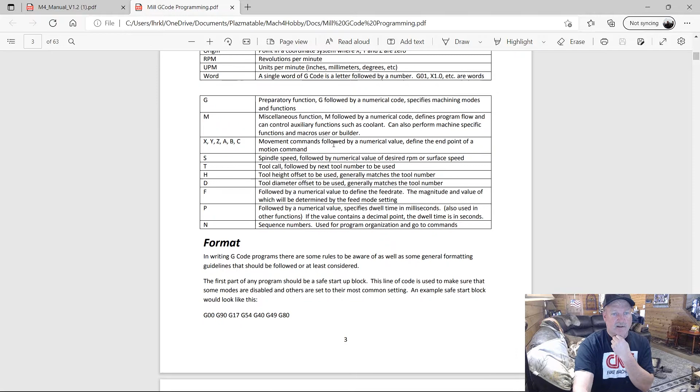I'm trying to learn more about the milling part of things in case I can put a spindle online at some point. But that's not what I'm here to tell you right now. I was just telling you that you need to read that manual through. So I've already got it opened up right here. I forgot I already had it open.

So if you look at the top of this, Philip, you need to look through this manual. This is really a pretty well laid out manual, actually. And a lot of the things I didn't know early on, even though I'd read this, I just have a better understanding of it now than I did then, because I've done so much stuff with it and I understand a lot of the things.

If you read this for the first time and you don't really know for sure, Mach4 was on the old Series 1 controllers that had the old chain drive, as far as I'm concerned a piece of junk type system, which people would argue were wonderful, but it's like any plasma, whatever they have, they think is great. So the Mach4 XT machines were the most modern ones that they built. That was the last versions they made on this platform, not talking about their commercial type stuff.

But if you read through this, I just want to show you that this is there, and if you need a copy of this, I'll be glad to send it to anybody. It was on your computer and on your USB drive, I'm pretty sure. This is really all we have that Ross wrote to help us know how to use the machine, okay? Next is, I printed your G-code, Philip, that you were having issues with.

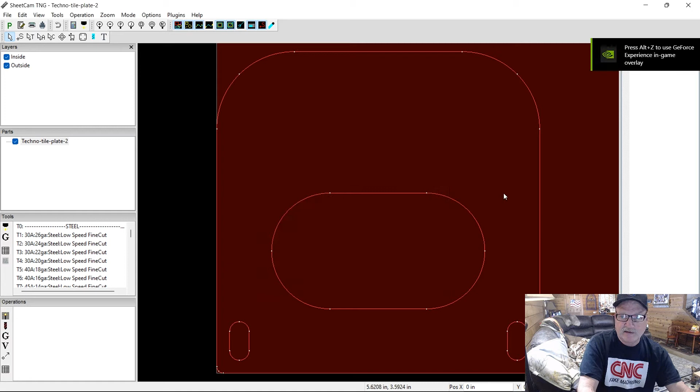Okay, I know this one has bigger holes than your other one, and probably you had more problems with the other one. I don't really know, but just in case this is helpful to anybody in our group or anywhere, if this ends up on YouTube, that's just what you do.

You import your DXF file, and you can zoom this up, whatever you want. I usually keep the screen as clear as I can. This code editor is where your G code will appear when you're done post-processing. I usually just slide it out of my way and keep this up here as big as I can.

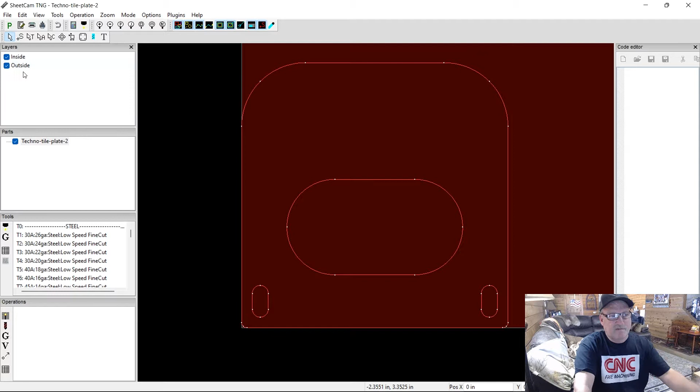So anyway, I don't know who drew this file, it's not saying that it's bad, but when I draw something, I usually have it all on one layer. Maybe you move these layers, I don't know, but so you have your inside layer, see there it went away, and then your outside layer. I normally move them anyway when I have some holes. These are big holes, so it probably wouldn't matter.

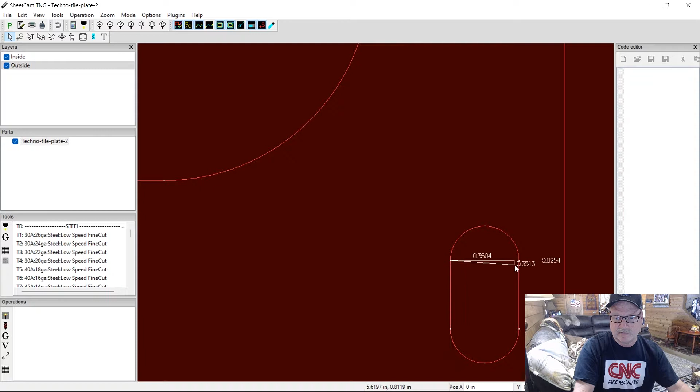This hole, if you wanted to measure it, that's 3/4 long, and I think it's 3/8 wide or something. Yeah, it's not super small. This one's pretty big. It's 4 1/8 by about... that don't make sense. Let me do that again. Maybe it does. I didn't remember it being that big. Measure. It says it's 2 1/4 inches by 4 1/8 on that big hole. So anyway, those are pretty good size.

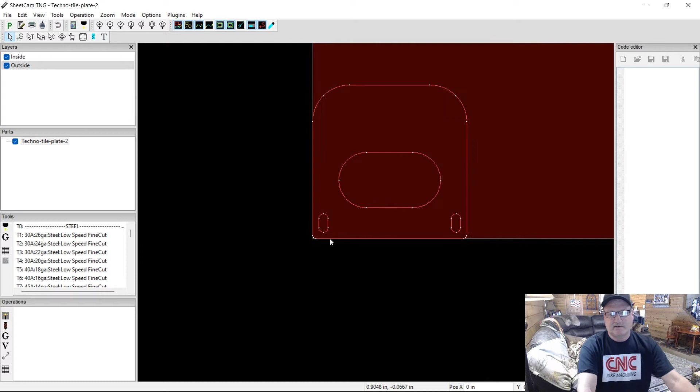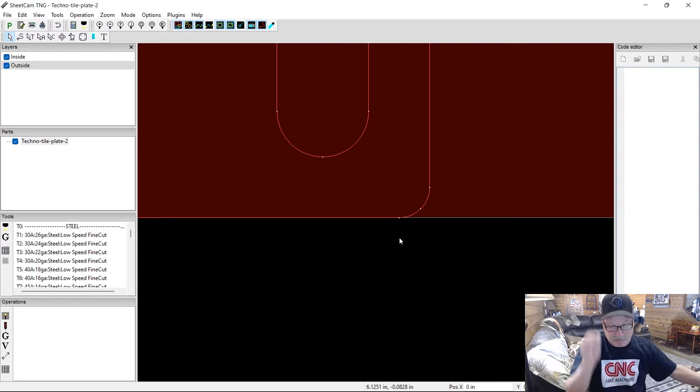And the thing that makes it hard to cut something like this without having a little spot on it is that everything on it has a big radius. I don't know what size these radiuses are, it don't really matter. It's probably a 1 inch radius or maybe a 1/2 inch radius. It's hard to put a lead on something like that without leaving a little spot on it. So I try to put those leads somewhere that hopefully they don't show up at all. I'll show you how I do those leads. And again, I'm sure you've already seen this. So let me just get into it real quick.

Now, even though these holes are bigger, I'm going to use the same type of methods that I would use on a smaller hole, and you can see these probably better than on a smaller hole. Mainly the reason I'm doing this is the G code that you sent me. The one I printed the first page of was on plate number 2, so that's the one I'm doing here. So the first thing you want to do is go over here to create a jet cut operation. What did I click? That's not it.

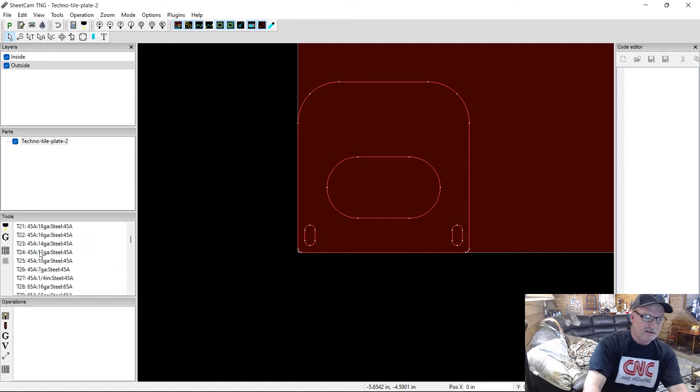Okay, and I noticed you were cutting 3/16 material. 7 gauge is what they call it in this tool. I don't know why they show this tool list here, because you don't really use that in Sheetcam much anyway. So we're going to start an operation on our inside. Make sure this says inside offset. Our layer is going to be inside, since you already have that layer. So we're going to cut all our inside features. This tool 26, 7 gauge steel, 45 amp, that is the right tool. This is exactly the way I would do it.

And if you'll notice, that says 70 inches a minute, and that's about right. 3/16 cuts 70 to 75 from my experience. And on that screen you had on Facebook, it looked like this machine was set at 98 inches per minute. That's part of your problem, I believe, on some of those cuts. It won't cut 3/16 at 98 inches a minute on 45 amps. It could be that you had that set on 65 amp, I don't know for sure.

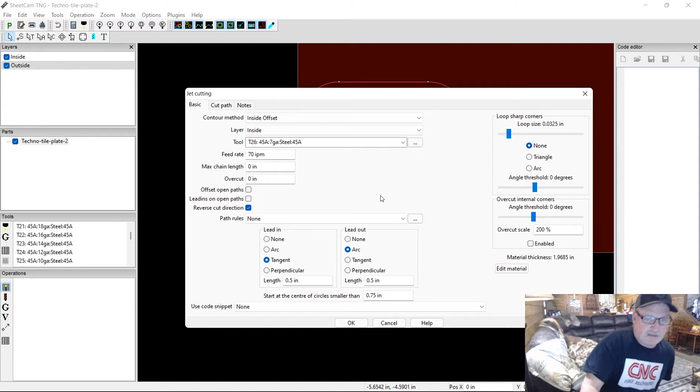If you have a 65 or a 45 XP or what, but on a 45 amp, you want to run that around 70. 70 works great, and I'm talking about big cuts, not little holes or anything like that, but 70 is a really good number, and you want to keep that at 60 thousandths off the plate on your cut. I know I'm getting sidetracked, but that's just something I observed when I was looking at that.

So to make that, we did an inside offset, and we're on the inside layer. That's the right tool. We don't mess with any of this stuff. We can do an overcut on holes. I would probably do an overcut of at least whatever the kerf is, and I didn't look at that kerf. I don't remember what they are, but let's just do about 50 thousandths or so. I'll go ahead and put the third number just so it makes us think about what we're doing better. 50 thousandths of an inch overcut. That may be too much. I don't know. You can play with that and see how you like it.

And then you want to make sure this is reverse cut direction, you know, like climb milling. Inside hole is counterclockwise, outside cut is going to be clockwise. That's the way it always needs to be. So your tool is to the left side of your movement when you're going. Just remember that you're always cutting to the right of where your tool is as you're moving along. So it has to be that way for it to cut as clean as it can.

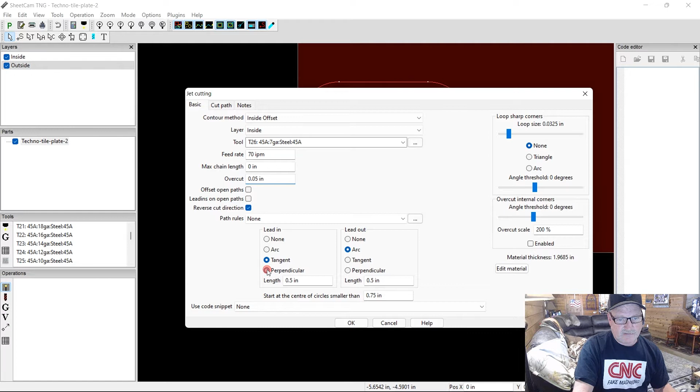Now on our lead in, usually on a hole you do a perpendicular. This is the way they teach. I'm not saying I made this up. This is the way I was taught. This is the way Ross taught me. This is supposed to give you the best result on a hole or a radius type cut, perpendicular. Now you can try both ways, and you don't really need a lead out on a hole. I think it gives you the best result using a little bit of an overcut.

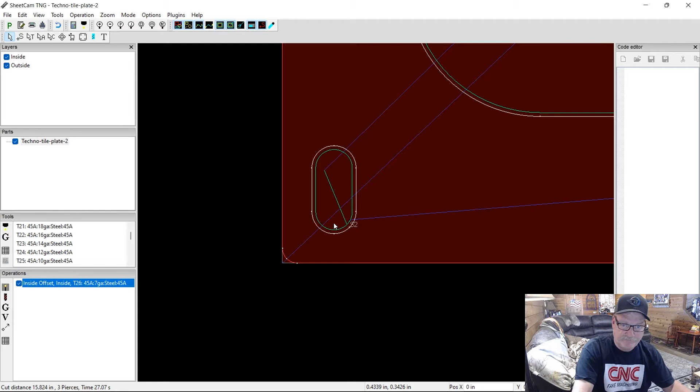Okay, so we'll do the lead in length. I don't know what length we need. Let's leave that alone for right now. We're not doing a lead out, so let's say okay. So that's not very good. That's too long. You want your lead in to be half the distance of your hole. Okay. So right here is fine, but on something that big, I probably don't even use a perpendicular. So let's just double click back in here and let's change this. I think that was a 3/4. Let's go 0.3 inches on that lead in, and let's change that.

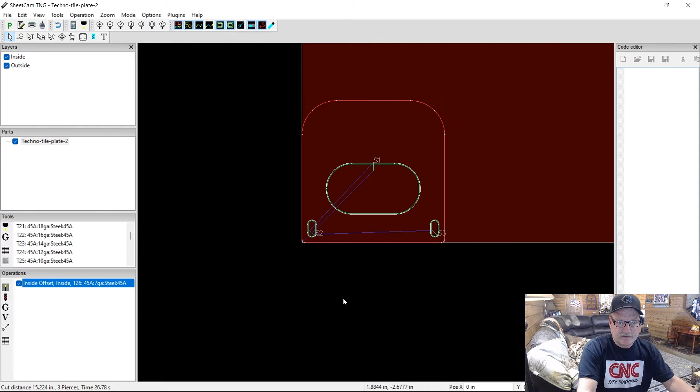I didn't change it, did it? What did I say that whole length was? I've already forgot. Yeah. 0.3. Huh. Oh, that's only 3/8 wide, isn't it? So that radius is 3/16. So yeah, this needs to be somewhere around 0.15 on that lead.

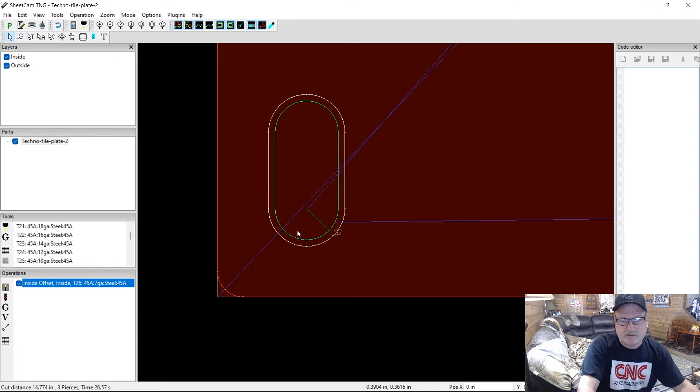Okay, now I don't like it being right there. To me, the more of those leads that you can put down in the end of this, the less visible they probably are. If they were along this edge, they're probably more visible to people. I worry about how stuff looks all the time, so just to get the best result, I would put it right down in the bottom of this. You can try anything you want, see what result you get.

But you go over here to start, edit start points, and you can move this to anywhere you want like that. And same thing here. And I don't like this lead, so we're going to change it anyway. But if I was going to use those leads, that's the way I would do them, right down in the bottom of that radius.

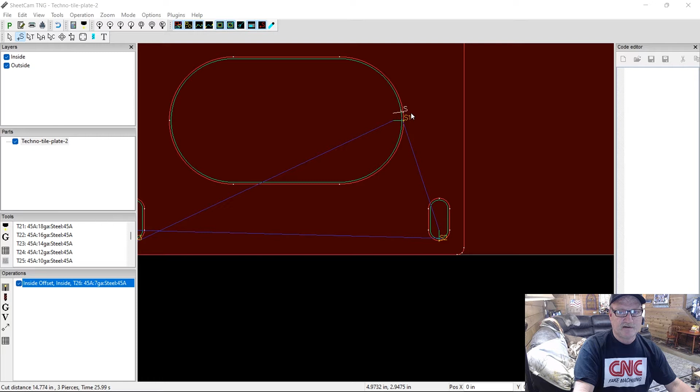All right. Since we don't like this one, let's right click on that and go to properties. And it says use operation lead in. We're going to uncheck that. We're going to make our own. I think I'd probably go ahead and use an arc lead in on this one. And we could use a lead out and see what it does on that. But let's make this, yeah, 1/2 inch is a pretty good size. Let's just go ahead and put an arc in there and see what that looks like.

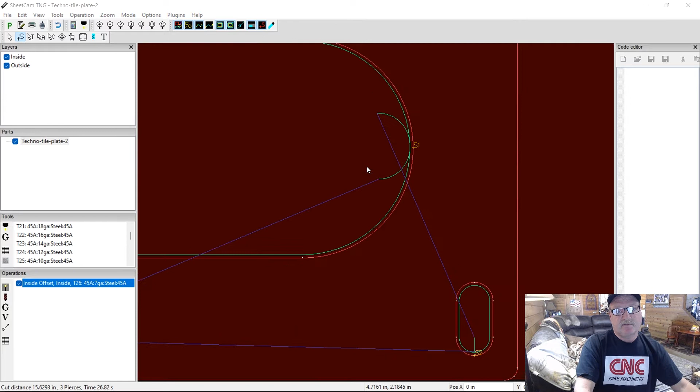So normally you can't do very good on a radius, like I've said before. Sharp corners are pretty easy. Any type of arc is going to leave you some kind of mark that's hard to get away. But if it was down in here, you could come in here with a die grinder and blend that stuff out and probably never find it, if it was important enough to worry about. If not, that's probably going to be your best bet. And if this was just a really tiny small hole, I probably would do the perpendicular and do an overcut. Now, we don't really want an overcut on that.

Let me get back to that properties. And see, they've changed up this program so much with the updates that I'm not sure. Where is the overcut? No.

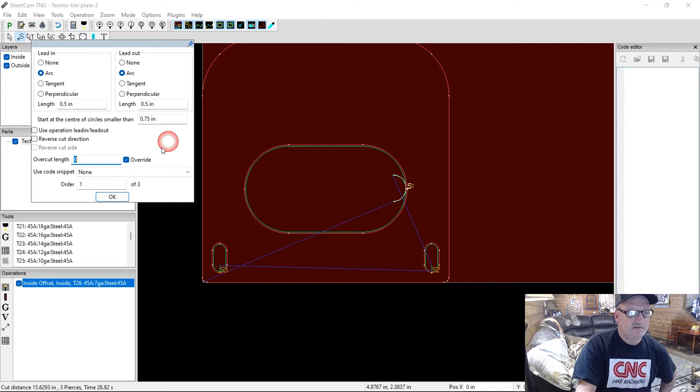Override. No, there's no overcut, I guess. Even if there was, I'd probably just, I don't guess there's an overcut. Anyway. No, there's not an overcut on that one. Let's see if there is on these. Yeah, I think there's an overcut right there.

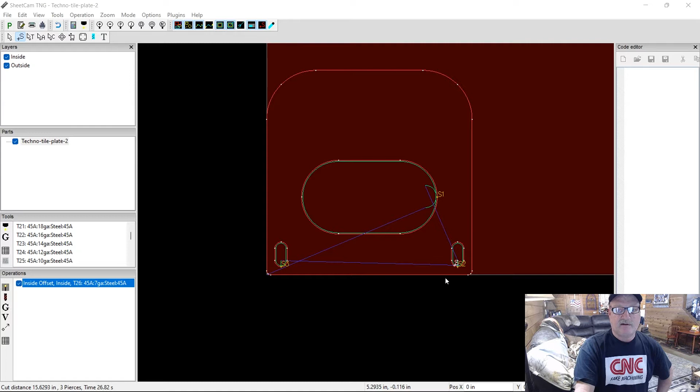So anyway, I was going to say, just pretend that's a circle. That's how you cut circles, do a perpendicular lead. That's at least the way they've taught me. Then let's change this one to a different one. So you could cut that. You've probably already done cutting this. I'm just saying it on anything. Just for an example, go ahead and change this one to something different. So go ahead and unclick that.

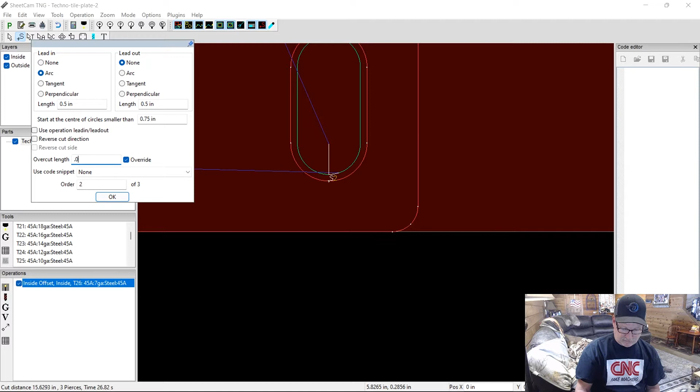Let's just put an arc in there. And I wouldn't put a lead out. I'd still do an overcut. I don't know where that overcut is. Let's change that overcut to, I don't know, let's do 30 thousandths overcut. I don't know how much it needs. Whatever covers the curve probably is enough. Wow, that's a huge. Go back in there and look at that. I messed up. Yeah, we don't need much of a lead on that, so

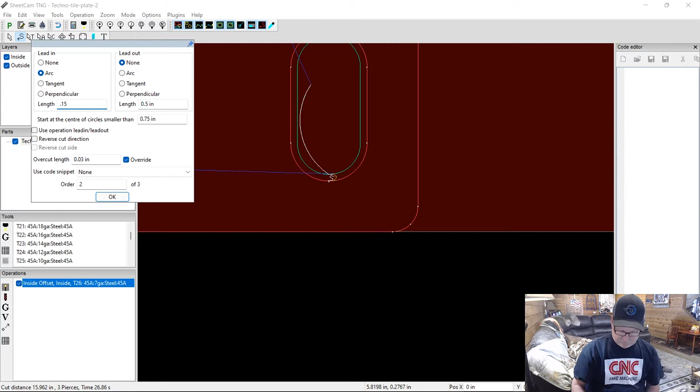150. .15. Put the third number. I like those. 150 thousandths lead. Okay, see, now to me that looks a little bit better. That gets you more away from the material than that longer lead did. So you're starting a little more towards the, you know, I wish it would start more in the center and then come all the way around like doing a circle, but I don't know of a way to change that really.

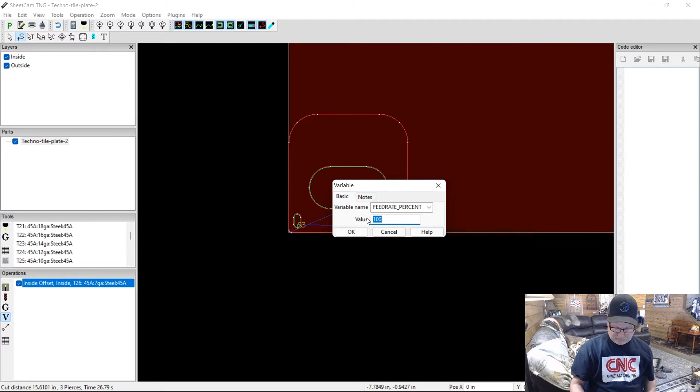So anyway, I think that might actually work better. You would think it would by looking at it, but they've always told me a perpendicular lead works better on a circle, so I don't know. It's probably not enough difference to matter. Okay, so now remember we need a variable on holes. We're just pretending these are smaller holes, but in this case, let's just go somewhere around 75%. This is not a fast cut anyway.

So if we're at 70, now remember the machine sets the feed rate, so that percentage you can play with on your machine. On Mach4, look at that percentage that it's set at, and every time you bring the G code in, you can change that percentage, and if you don't like it, then close the G code, change that percentage to say 90% or whatever, and bring it back up. And that'll change your feed rate. But let's go to 75%, and remember you have to drag this at the first of your deals.

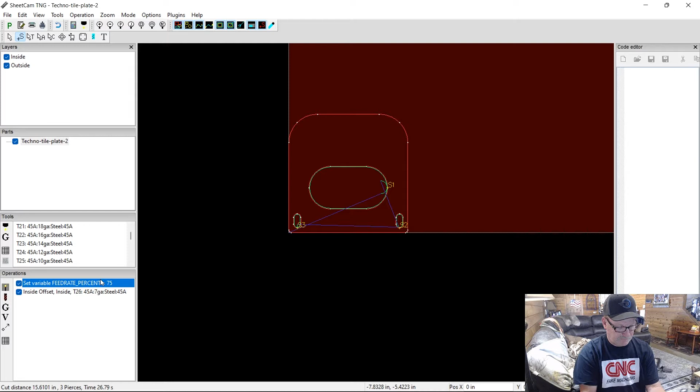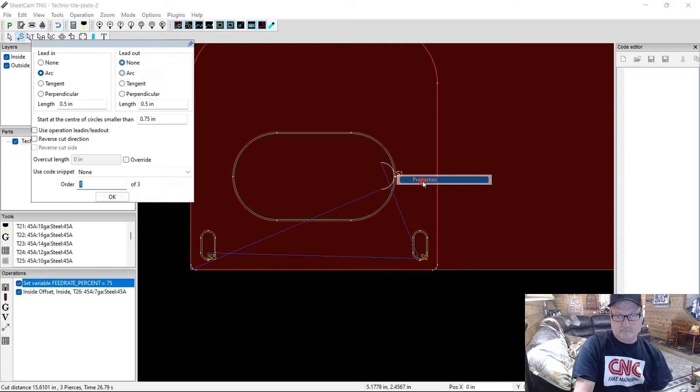So now we're going to be at 75% of, let's say 70. I got a calculator here just for instance. 70 inch per minute times 0.75 is, we're only going to be at 52 inches a minute. That's pretty slow, and that's too slow for cutting this. So I wouldn't do that. Honestly, on that cut right there, what I would personally recommend is change that. I don't know if you can change that in here. Actually, you can't.

I hate to just dwell on something like this, but I'm just trying to make sure you understand. This is such a big circle, I wouldn't recommend cutting it that slow. You can if you want. You're just going to have more slag and dross on the back side of that cut. It'll cut fine. It's just, to me, it's a little too slow. So on these holes, I probably would, because they're only 3/8 wide. And even that's pretty slow. But in this case, what I think I would do is,

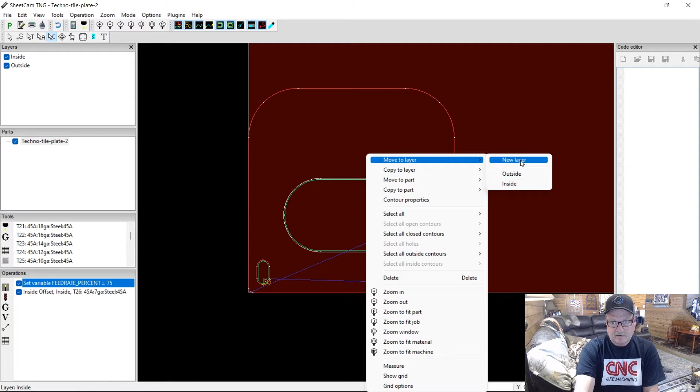edit contours. Remember how you do that right here? Edit contours. What I would do is right click, move that to a new layer. This is just examples. This ain't saying this is how you should do this. Let's just put big hole. I know it's not really a hole, it's more of a slot, but let's just say big hole. And so see right there, that's that big hole.

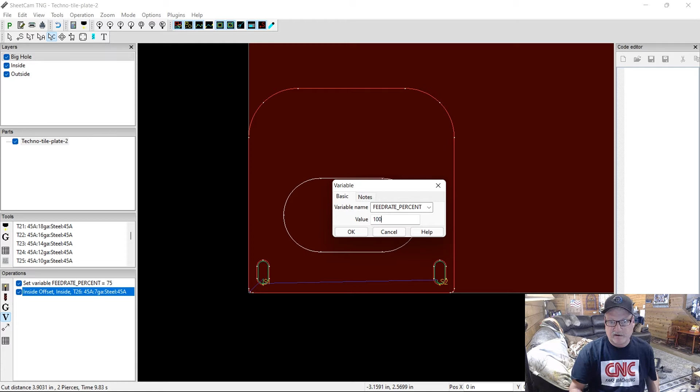And now what you could do would just say, now we need to change this variable back to 100. Now remember, when you turn your variable on, anything below 100, it turns your torch height control off. And on some distance that your torch is moving around on, you may want that on to make sure it's on the same plane and it's not gonna dive or drag the material or anything like that.

So hopefully this is helping you. Maybe it's just a nuisance to you, but this is on its own layer, and I know this is a lot of time and you wouldn't necessarily want to do this. You could just throw this on there and cut it and it should work fine anyway. But those holes there are fairly small, because they're 3/8 wide.

But let's just do another operation on that layer, and let's just say it's still an inside offset and it's on layer big hole. And remember, we were going to do an arc in on that one and an arc out. And let's just leave that a pretty good size lead at 0.5. And let's not do an overcut, so let's put that at 0. And that's all, I think.

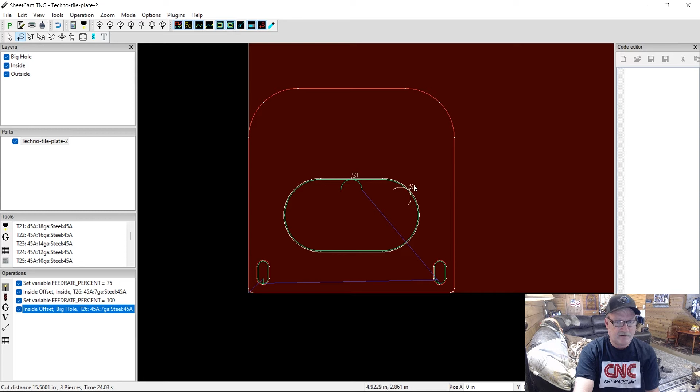And remember, we wanted to move that, so you go to start point. Oh, I'm not on that layer, so I need to be down here on that operation. Now, see where that kind of snaps to the center of that arc. So that way it's going to come in and lead in there, make the cut, and then it comes back here. It's going to lead out right there.

Okay. Sorry if I'm telling people things they already know. I'm just trying to be sure I'm covering different ways of doing things.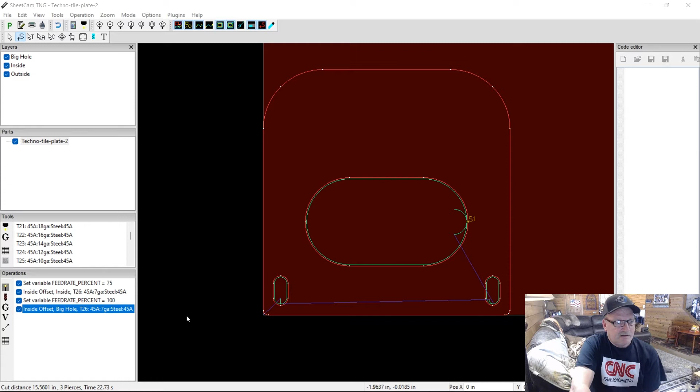See, we got a perpendicular there, and you may not see a hill of beans difference in that, but if you do two different methods on the same part, at least you can look at it and go, yeah, that made a difference. I think I like that way better than that. Or maybe I should have put a longer or shorter lead, or more or less overcut, to see if that would blend a little different there.

I mean, this is fire cutting. This is plasma torch. Don't expect this to be like a machined surface or a laser cut or water jet. This is plasma. It might as well be a cutting torch. It's not perfect, but it's pretty good.

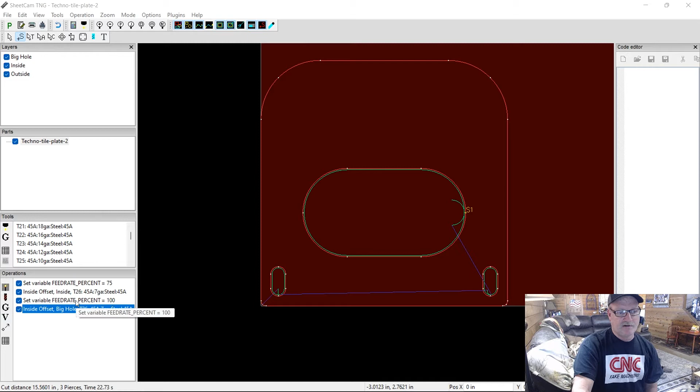So in this case, all we've done is cut all the holes out, so we need to do another operation. Now, we're already 100% on our feed rate, so we don't need to mess with anything else on that. So let's just go in and make another operation. Let's go outside offset on our outside layer. And it's looking like it's going to do no overcut, which is fine. Let's do some pretty big leads. 1/2 inch might work fine.

Let's try a tangent lead in on this one. Let me show you that. And an arc is probably fine to go out on that one. So let's see what that looks like. It's going to put it in this goofy place, and I almost never like where they put those. So let's move that one. I would put it right here. Remember, you got to click on the operation you're talking about.

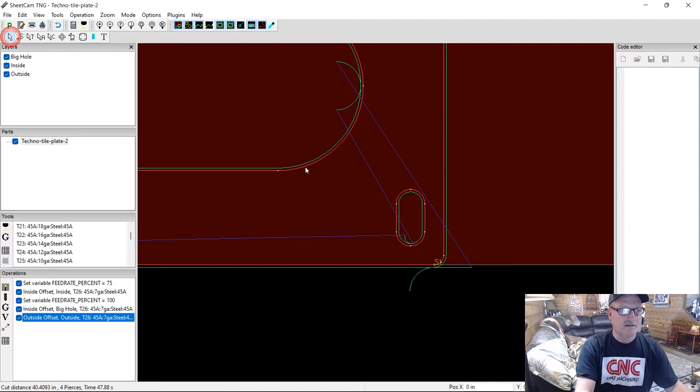But see how that wants to do stuff like this? Now, if you don't like it down here off the material, be sure you line your material up where this lead out will work. But see how that's going to be a smooth cut. Let me just click it right in there. See how that's going to come in straight on the material and just start cutting.

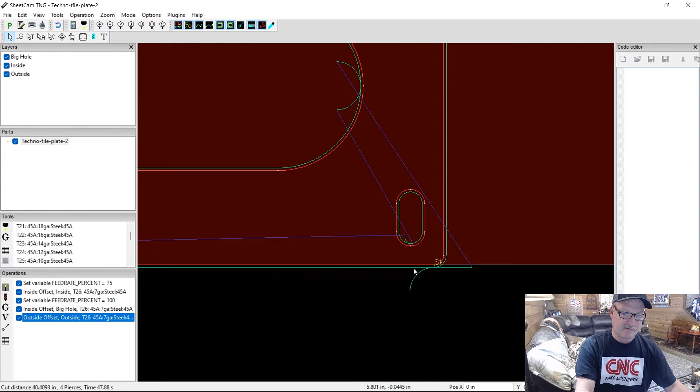And when it comes all the way around, it's going to come around the corner and then kind of lead off of it. So you're going to have a little pip spot of some sort right there, but you know what? That's pretty much a perfect spot where you could take a little grinding wheel or anything and just blend that off if it was bad enough. It may not be bad at all. But you can play with stuff like that and see what you think about it.

You could even put big leads up here, and wherever you want to hide that little lead in or lead out is where I would put it. Now, if these were sharp corners, I would put tangent on both spots, so you know it's going to come straight in, and when it comes out, it's going to go straight off.

And probably there's settings, if you'll read the manual, on when to make the torch come on or off. Sometimes they want the torch to come off at the right point of when it, I guess, is about to clear the material or something. But that's a little more difficult to understand. I'm not an expert on that for sure, but it does talk about that in that manual I was telling you about.

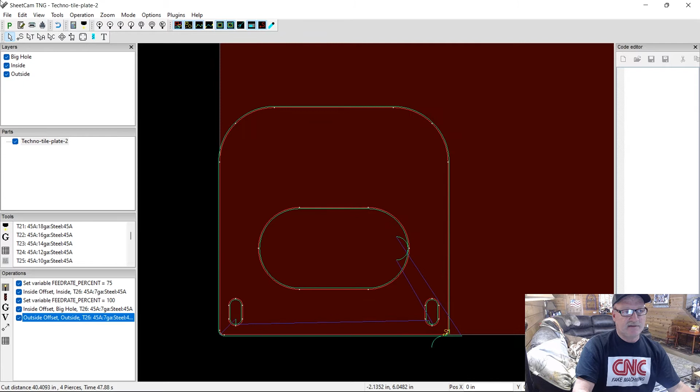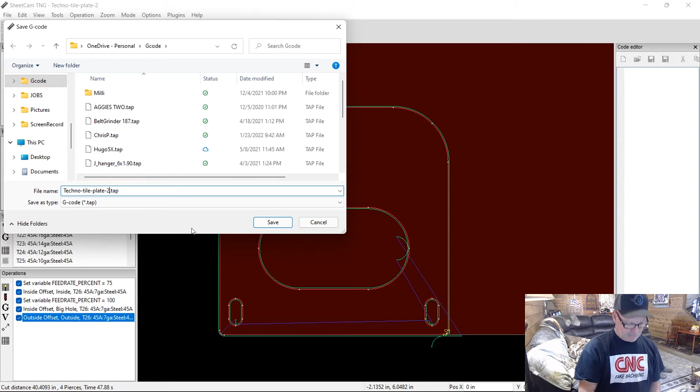So now that you see how I did this, all you do at this point is you run the post processor, and it's going to just name it something. I've already saved this, not this time, but let's just save it. I'll rename this again for, I don't know what version this would be. I'm just going to put it a V because that's when I was making the video. And let's just save that, and that's in my OneDrive G code, so save.

Okay, now once you push OK, then your G code shows up right here, and you can print it, edit it, whatever you want. Now this is where I want to kind of dissect the deal. So let me see if I can pull up your G code here. I wish I could pull it up on the same screen and we can kind of look at them. Okay. Now, number one, if you'll notice, your G code says revision 9B. Mine is revision 9F. That's your post processor that Ross wrote up.

If I was you, I think I would update it and see if that helps any of your trouble. He's debugged some of this stuff, and I could go in and look for that G code, and sometimes there's some notes about what he has fixed with the post processor. But if you have an XT machine, as far as I know, that's what this post processor is for, this 9F. You may want to save that or make sure you have that file backed up somewhere. But I would update it to this revision.

If you don't have that, holler at me. I can send you that file, I think. See if I can find it. I mean, I know I have it somewhere. So, and we can step through how you, if you will look at, Ross actually has some good videos. I'll show you those in a minute if I get time.

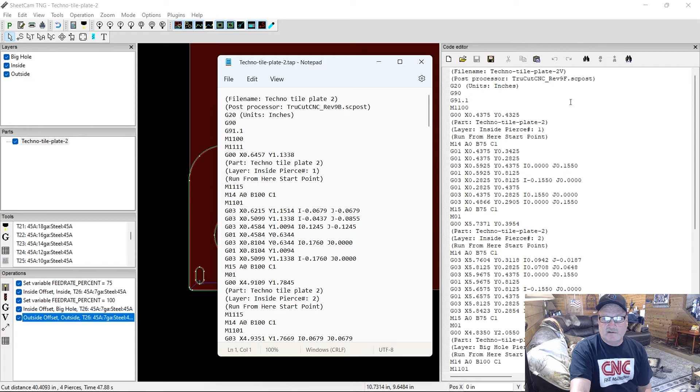So anyway, here's the same part that he made with his G code over here, and this is one that I just made on the video. So number one, if you don't know much about G code, some of these are a little weird compared to normal milling machine G code, but let's just start dissecting this and see if we can figure it out. So number one, G20 means it's in inches. If it was G21, it would be in metric, meaning all the moves were in millimeters instead of inches.

Okay? But we're in G20, which is this first part of usually any code, basically your safe code that puts the machine into what's kind of considered a safe mode, meaning it's canceling out anything that might be in there. It's just starting it fresh. So G20 is inches. G90 means we're in absolute mode. So we're moving from 0 to wherever that point is on the plate.

G91.1 is an incremental move for doing these circles, which is the G03s and the G02s and stuff, which is arcs. G03 is a counterclockwise arc, and G02, which would probably be on our outside cut down here, is going to be a clockwise move.

Being in 91.1, there's different ways of doing it, but in this case, that means when they call G03, they're saying at this point right here, we're at X blah blah and Y blah blah, and this I right here is going to be the point of the circle. I don't want to get into that stuff, and I barely know what I'm talking about, but I is your X and J is your Y, and so that point of the arc is where that is, and this point of the arc is on the X.

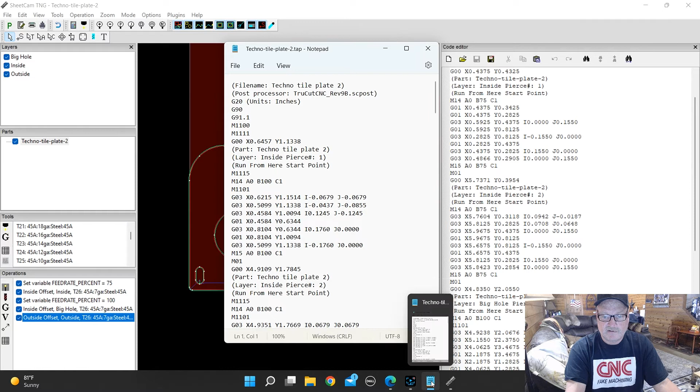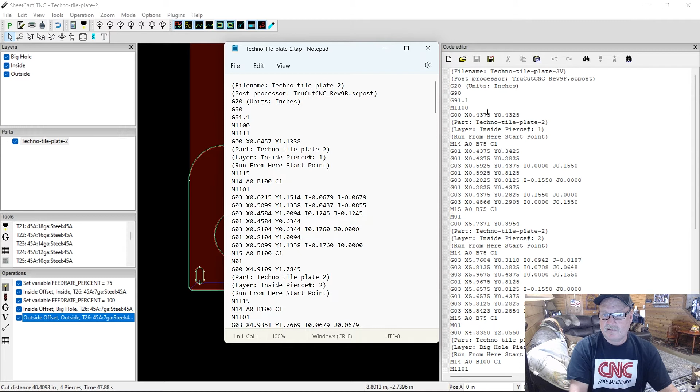So I think I've got a code that I had down here. I may have already closed it, but I saved one where I made some notes in here to explain what all this stuff is, but we can go through it right quick anyway. What you can do is you can edit this right here if you wanted to. So what I did earlier is I just put that there and hit the enter button and separated this out a little bit so you can see how this code is written. And maybe you don't care about this, I don't know, but I'm just trying to make you understand what's going on here.

So you can go through here, and if you'll notice, there's an M01 at the end of these codes, and that's kind of important because the reason that's there is so you can start. If you were to start it, you can see it says run from here, start point. So if you have optional stop on Mach4, you can turn optional stop on, and it will stop the program right there after that cut.

And if you needed to do something, it's going to stop after every one of these shapes that it cuts out. It'll stop. And if you were worried about whether it's going to have a tip flip up or something, or you need to get some pieces out of the way, you could actually have optional stop on.

So, you know, I've never really thought about doing that before, and that could actually be pretty useful. It'll stop every time, and all you do is hit cycle start, and it'll go to the next one. So anything in parentheses here is not part of the code on any G-code machine. It doesn't read that as anything. So anytime you want to put notes in somewhere, just put them in parentheses like that, and it might be helpful to know what you're doing.

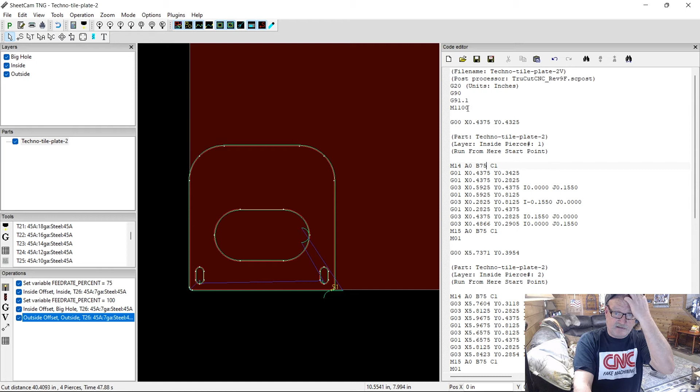Now, if you were to change this back to 100, that would be at 100%. And you could just say, hey, I don't like that, and probably manually edit that code, maybe even out on the machine. I haven't actually tried that. You could probably change that to B100, and change this to M1101, or find out in the code where that comes on. You know, you could play around with that. Like right before it comes in, right after that initialize the cut.

Now this code, this M14, like I said, it says initiates cutting sequence. That's what I was trying to get at. M14 means it's turning something on. So what that's doing is turning on a module that's in that box that, as far as I know, none of us understand, all of those controllers inside the end of that plasma table. That's a bunch of crazy electronic looking stuff, but one of those modules has software built into it, and this is telling it to do something.

So it says M14 A0, that's the feed rate, I know that much. So that's the Mach4 controller. I guess it's the Ethernet, what's he call it? Smooth Stepper, I think is the name of that type of module. He talks about that in the manual. It's just sending a code to it to say, okay, we're fixing to fire the torch. We're getting ready to cut. That's what that code right there means, M14. And then this is just the moves it makes to do whatever shape we're cutting here, which was the first hole or slot, whatever you want to call that.

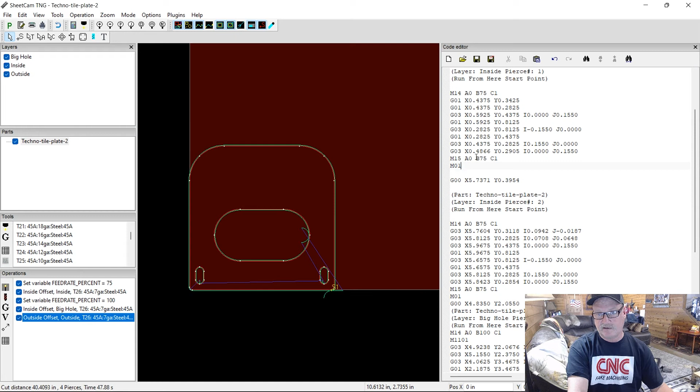And then we're going to go to a rapid move, and it's going to move to the next position, which I don't know where we're at. That's on the first one. I guess it's the one over here. So see, X 5 inches this way, 5 and nearly 3/4 inches this way. And then it's going to initiate that cut. Oh, if you didn't notice the M15 right here, that means cut sequence is off. So it turned off the torch and whatever that module is taking care of, that's what M15 is right there.

So then it did a rapid move. Now it reinitialized the cutting sequence here, did that shape, turned off the cutting sequence. Anyway, on and on and on. That's just what that stuff means.

M1101 right here, like we've already talked about, that's turn torch height control on. Because see, we were at 75% there. So those first two holes were where torch height control was off. And then we turned M1101 on, because see, we're at 100% feed rate. We did that shape right there, which was their big hole. Right here, this big hole, big slot, whatever you want to call it.

M1101, and it did that cut, and it stopped the cut. Now remember, 1101 is going to be on now, from now on, because that's a modal code. So it's going to stay in effect until it's changed back or any other thing that turns that off that's built into the controller. So anyway, I like to separate this so you can see these a little bit better, but just to break down what that code is doing.

And that may not be very helpful for you, but that's just something that I figured out here by looking through this. And you can do the same thing looking in that manual. Just takes a little time. So anyway, if you'll notice after that last cut down here, I don't know why it has M1101 on again. I guess because it was a different layer, and so it just put it in there again.

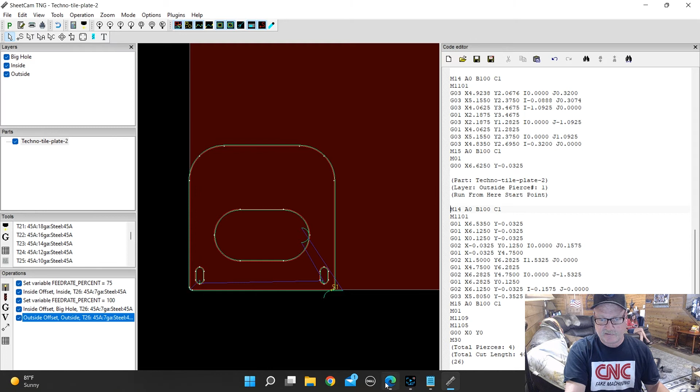So down here, M1109 and M1105, I don't think it's in the manual, but I can tell by those numbers that that has something to do with just turning stuff off because you're done with the cut. And this rapid returns you to X0, Y0, and you could change this X and Y to some different numbers if you wanted to, for it to not go all the way back home. Just change these numbers, or probably get rid of that whole line and it would just stay.

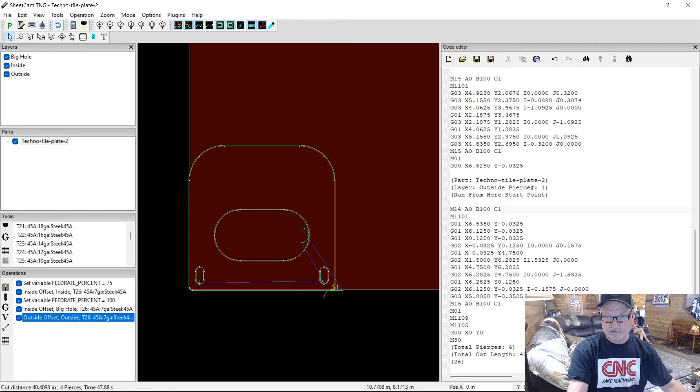But M30 just means it's going to end the program and rewind to the first of the program. In case you want to run that same program over and over, M30 just resets the program, puts it back to the first of the G code. All right, anyway, that's all there is to that. So let me look at these notes.

Also, as far as a lot of stuff in that manual that you may need to study up on, I made a little bit of a list, but airflow, anytime you're losing a cut. I've got a refrigerated dryer supplying air to my machine. One time I had to, I don't remember if there's a little filter on it or what, blow that out or clean it out. And also on the back of your 45 XP Hypertherm, there's a little filter that, even though you don't think it's restricted, I have had mine quit cutting here and there, and it was because of restriction with the air.

And also, what else did I put? You can reference that torch height, and I put that as page 16 and page 42. He talks about how to set that torch to be sure you're at the right pierce height, because at cutting height it doesn't matter that much, because the torch height control is taking control of that depending on how you've got the voltage set. So page 42, he talks about calibrating the pierce height.

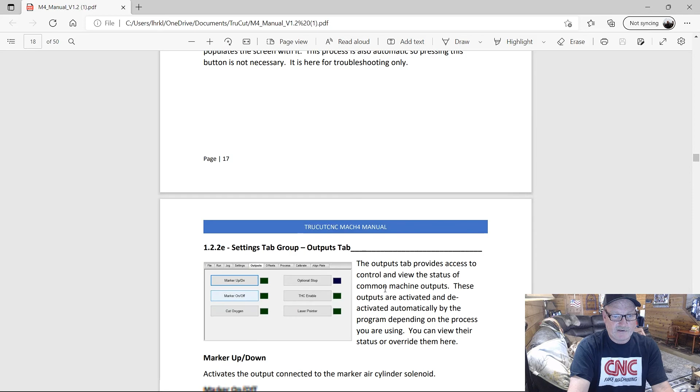Also, there's things in here about your torch height control settings, and I don't remember what page that is. But there is some info in here about the torch height control settings. Make sure they're set. I never mess with my settings, so I'm not sure what they should be. But if you need me to, I'll look at what mine are at sometime and I can tell you.

Also, the TOM travel was also on page 16. I got to thinking about that. That might be good to set that at a safer number, especially if you worry about that bottom switch messing up or something. Mine got messed up because so much water hit it all the time that the switch quit working and it was not very reliable, so I just bypassed it because Ross didn't act like he wanted to send me a new one for some reason. It wasn't very long before he went out of business. I bought some more online somewhere since then, but I didn't like that switch anyway. But that kind of keeps it from diving down and basically bottoming out the torch down into the table.

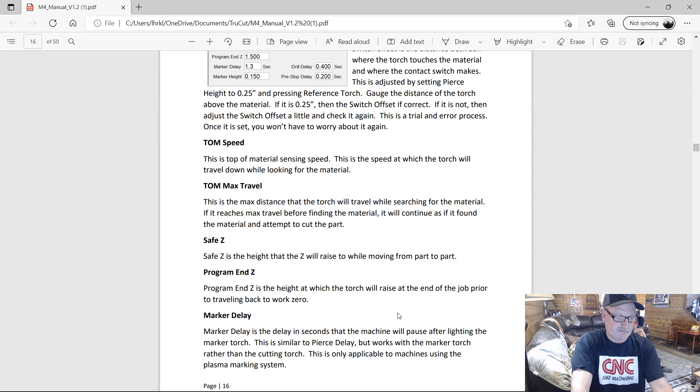So, like I said, your post-processor version to me is a little bit old. So holler at me sometime, you might just call me some weekend and we'll go through some of this.

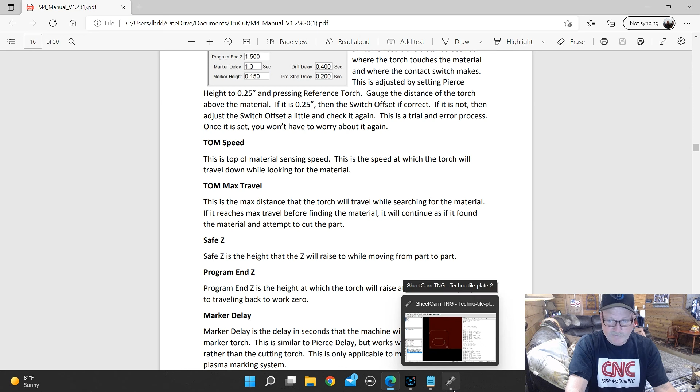I'll tell you what, I can send you these files that you need if you need them. You may not need them, I don't know.

So to run G-code from here, there's also a pretty cool deal where if you stopped for some reason because you had a problem, you can go back to your work home. Don't go back to home. Go back to the work home position, which is on your screen. And I'm not at the machine, but here it is. Go to work 0. It says right there. As long as you didn't reset or do something crazy, you can go to work 0.

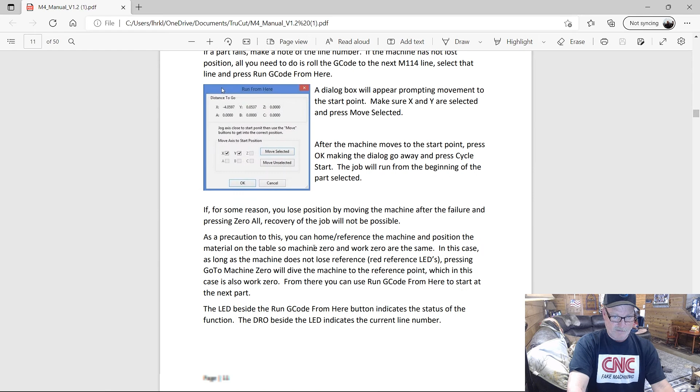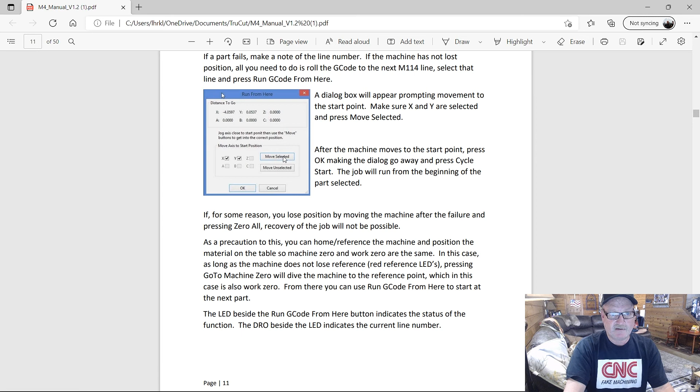If it'll go back to where it started, then you can go down in your code and go run G-code from here. And it tells you in here how to do that. But basically, you go to the screen here. You click your X and your Y or whatever and push move. Don't do your Z. Just move to selected. Click that, and it'll move to that spot. And just do a dry run or something to find that position in your G-code. And that's what you do.

You click on that line of G-code, and then that's where you go to run G-code from here. You click that somewhere on this screen. Run G-code from here is right here. And so make sure you're on that line of G-code, which I don't have the machine on, so I can't show you. But anyway, that's a pretty cool function that works pretty good. I've done it several times when you have problems.

You say, I just want to stop and I want to rerun that little spot because it didn't quite cut it right or something. Or it had a little tip up that messed up the cut, something like that. Sometimes you can just rerun that cut, and it may not be perfect, but it might save your project. Kind of like the ones you cut the other day that didn't seem to cut through good. You could just rerun those, and they probably would be okay.

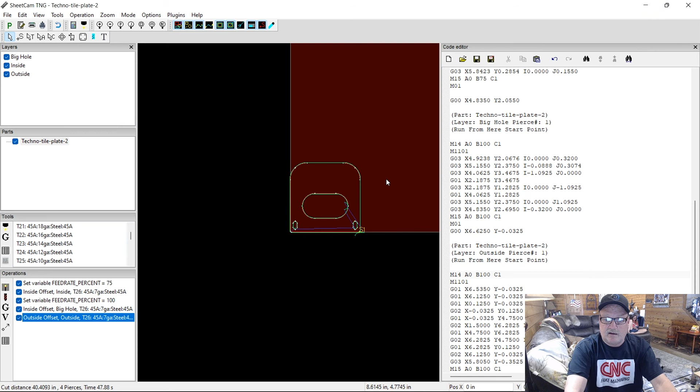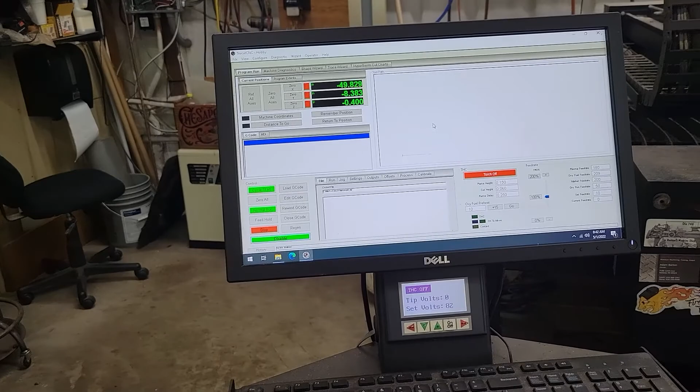Well, I went ahead and turned on the machine out here, so I'm going to have to go handheld. I've been looking everywhere for my GoPro, and it's out here on my desk. I've looked over here like 6 times. Anyway, there it is sitting there. I've literally been looking for it for 30 minutes, but I'm about to blame my wife for moving it.

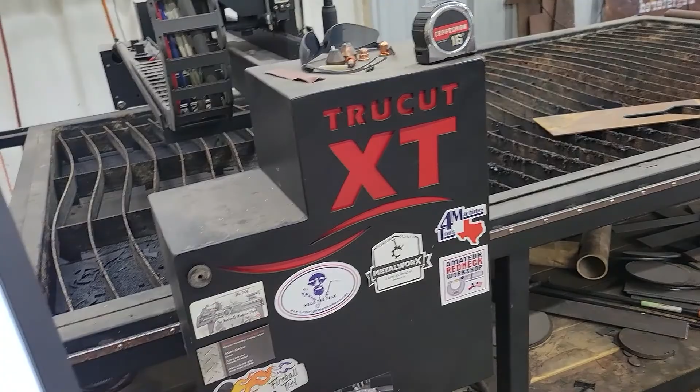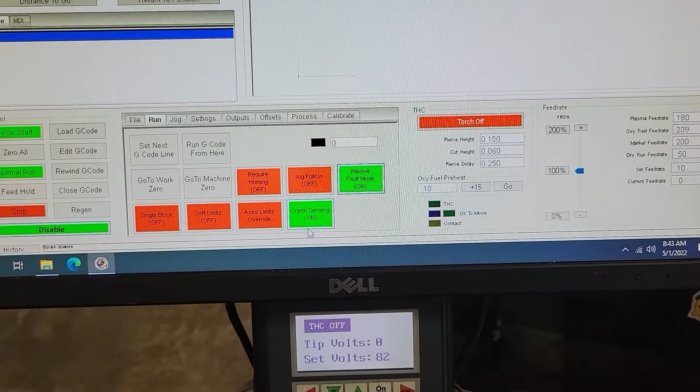Anyway, like I was saying, I wasn't on the machine earlier, so here's my machine. I don't use it very often anymore, but it works fine. See, there's no G-code pulled in here, so see if I can remember. And these headings, yeah, this is in your Run tab, so you can enable things here. Usually you can turn crash sensing on. It's probably the safe way. It may or may not cause things to happen.

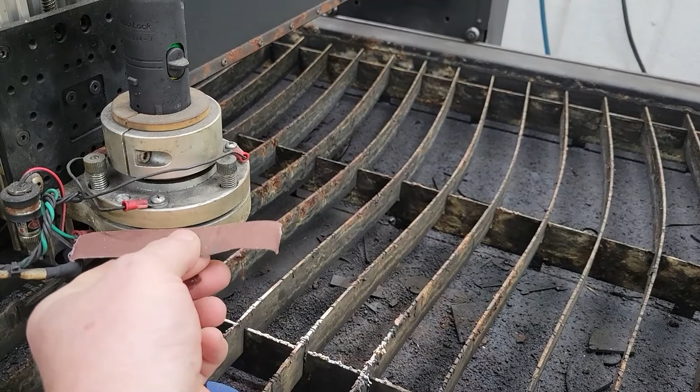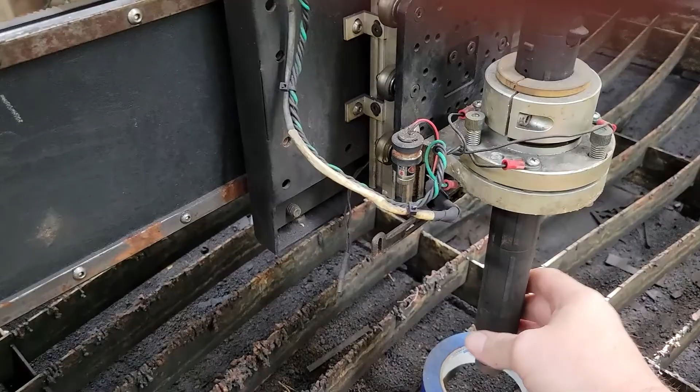One of the main things I do before I run is, because this crash sensing head here has 3 contacts where these wires are, there's 3 wires. Before I even run this, a lot of times I'll take a piece of sandpaper and just lift that up and get that in there and make sure those contacts are clean, because that a lot of times does cause trouble. You can just tilt it up and clean it, especially if one's been wet or it's been sitting, or just any time you're going to use it.

And the way you check that is, see if I can get this over here, when you're moving it like this, look on your screen here for this contact light to come on.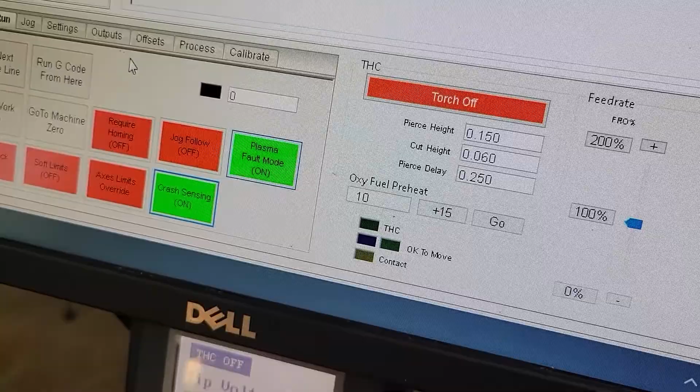So somewhere, see, right there. When I'm moving it, watch this. See that light flashing? It should go on and off. So move it in about every direction repeatedly and see if it comes on and off every time. If it does work every time, it's probably okay.

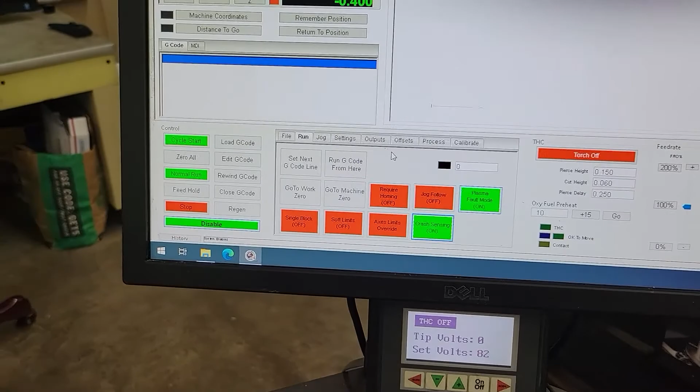A lot of times that light will stay lit. And yeah, that's going to cause weird problems to happen while you're cutting. It's going to stop the cut, and maybe some of the things you're talking about actually is going to happen. But I know I've mentioned in the first part of the video there about when you bring in your G-code to turn this percentage on, and let's see if I can see.

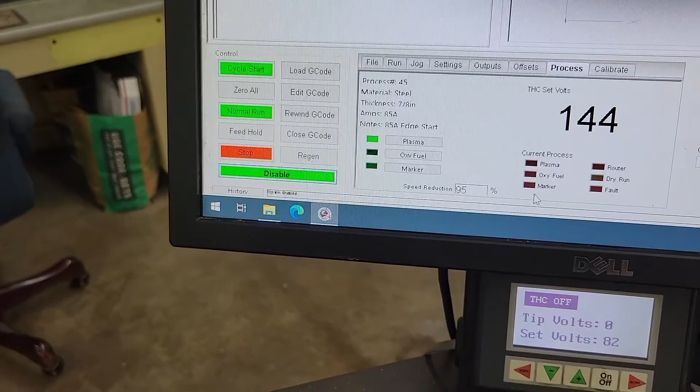Here's the process. Okay, you go to that process tab right there. And then right here's your percentage speed reduction. I think Ross used to have that down at 70%. That's a little too slow. And what that's going to do is when you pull your G-code in, it's going to change your plasma feed rate here to some weird number.

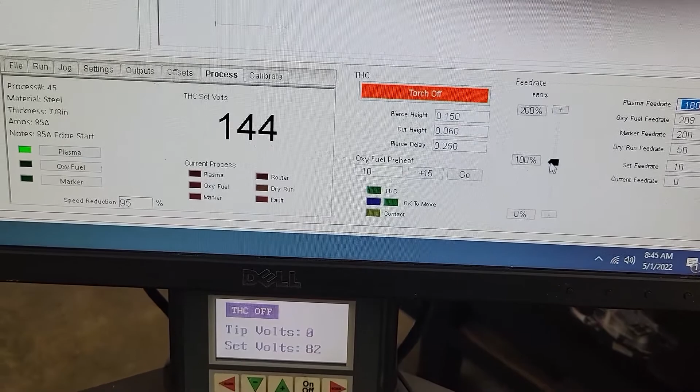Now you can probably just change it right there. I'm not sure if that's going to change it the whole time or if that's just going to do it for every cut. I don't remember that for sure. I know this feed rate that you slide up and down, I believe that just changes it for the cut that it's on. But the best thing to do is set this percentage here. So it's at 95%. I think that's where I like it to be most of the time.

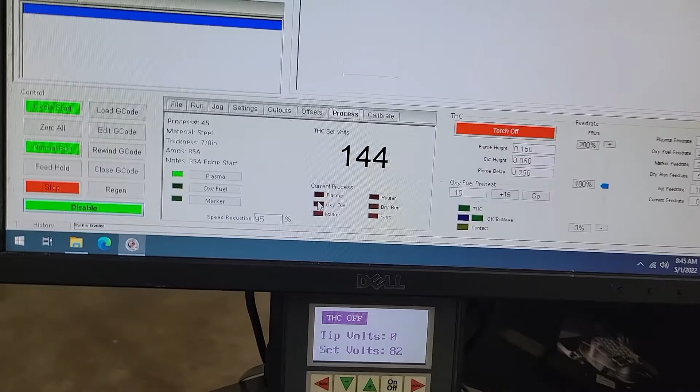We'll see. So when I pull the G-code in here, so right over here, see where it says load G-code? That G-code ain't really in there yet, but let's see if I can pull it from OneDrive. I mean, it's in OneDrive. I usually put it to the machine there. Let's just do that before I do that. So, you know, I saved it in G-code on my OneDrive, so that's that file. Let's just go copy, and let's go back to the desktop.

I like how this Windows 10 has changed where stuff is. Should be right there. Let's just go, oh my gosh, that's a pain in the butt. Let's just go here to the desktop and find it. That's just where Ross had it. Right there's G-code, paste. So now it's in there. Go back in here. Okay, now let's load the G-code.

So remember, that's on 95%. So I think that whatever SheetCam said it was, 70, it should be 95% of 70 is what's going to load. So load G-code. There's that file. There. So now, see over here, that's got that selected at 67.

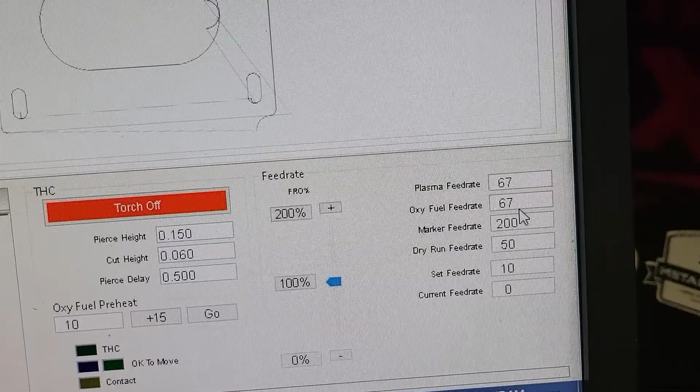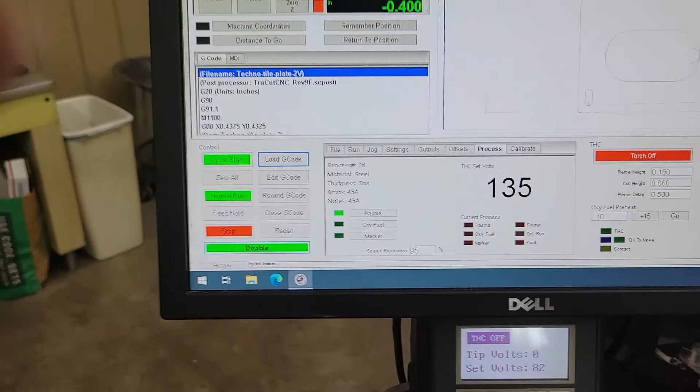I'm pretty sure on that video I saw on Facebook that Philip had on there, that was running at 98. Well, you can't cut 3/16 worth of plate at 98 at all. You have to have that at about, you know, 65 to 75 in that range. Man, my finger's in the way, isn't it? So anyway, you know, if you change that number right there to a higher number, then that will be higher. I think that'll work just fine right there, just 95% on this particular thing.

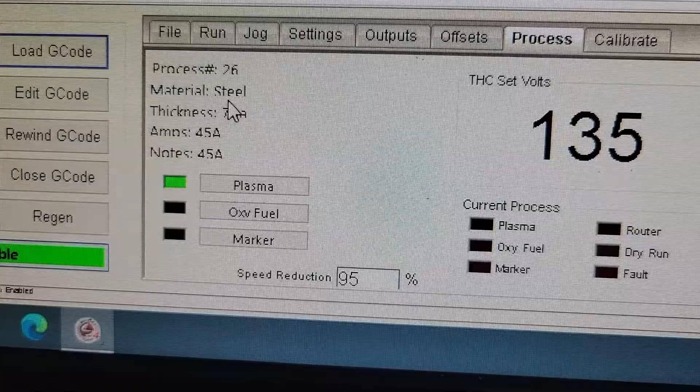And I just keep on sticking my finger in the way. See that? Here's your process. That's 7 gauge and all that. So your offsets, let's see what all's in here. Outputs. You don't want to mess with that right there. One thing I do in here a lot of times, I'll turn the laser pointer off, so it ain't just on all the time or whatever, or on if I need it.

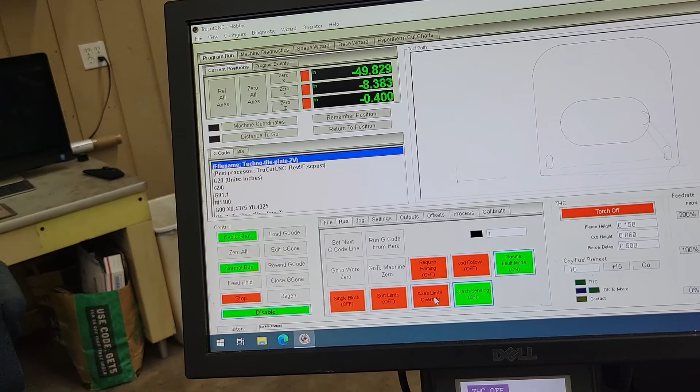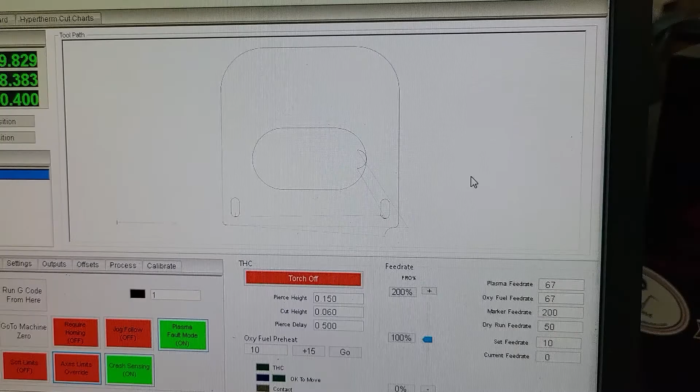Yeah, so you don't require homing to be on or anything. Axis limits override, you can have that on if you want, but probably dangerous. Anyway, there's the file and it's ready to cut. And I know it's hard to see on that screen, but there's the thing it's going to do. I don't have my air on right now, so I can't do a motion, but I wouldn't have any doubts that that'd cut just fine right there.

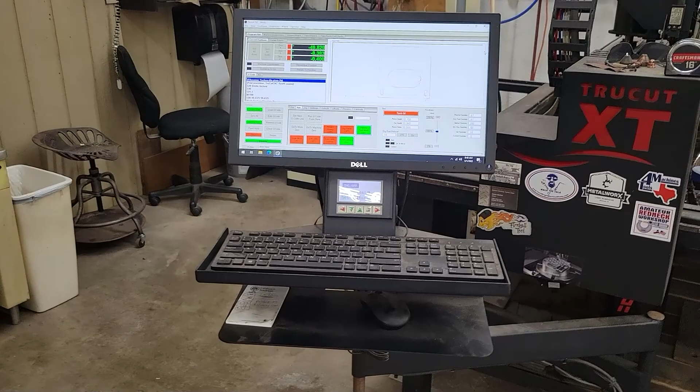So I'll go ahead and send you this file and see if you want to. I don't know if you're done cutting this stuff or not, or if you got a lot of them to cut, but I'll go ahead and send you this file over, and I'll send you this video. It's about an hour-long video, so I don't expect that you're going to want to watch all of it, but hopefully at least some part of it is beneficial to you.